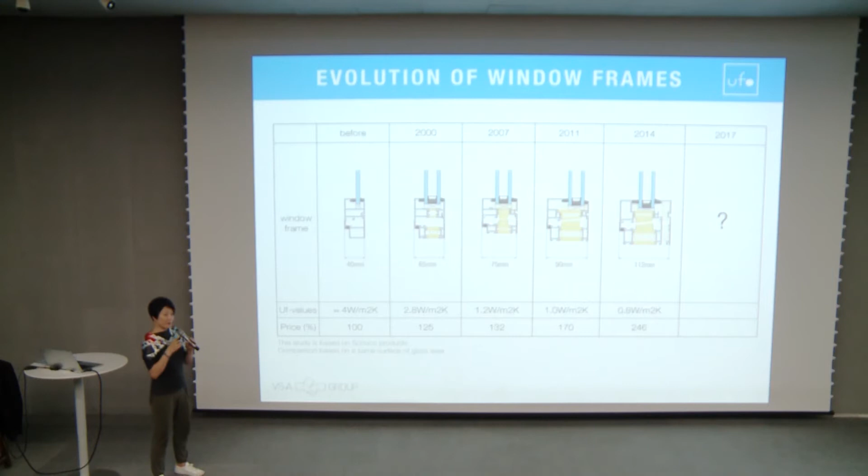So this is also the window frame evolution. It's really focused on thermal performance. So you can make a more performing window. Normally the window becomes thicker and more expensive. So you can really go in that direction, saying more performing, more insulating. But we really try not to go in that direction, but to think a little bit upside down.

It means, why don't we have a frame? Maybe we can just skip the frame, because what we found out is in a window, there's a frame and glass. What is very important and expensive is the frame. So if you can reduce the frame, you can really save a lot of cost.

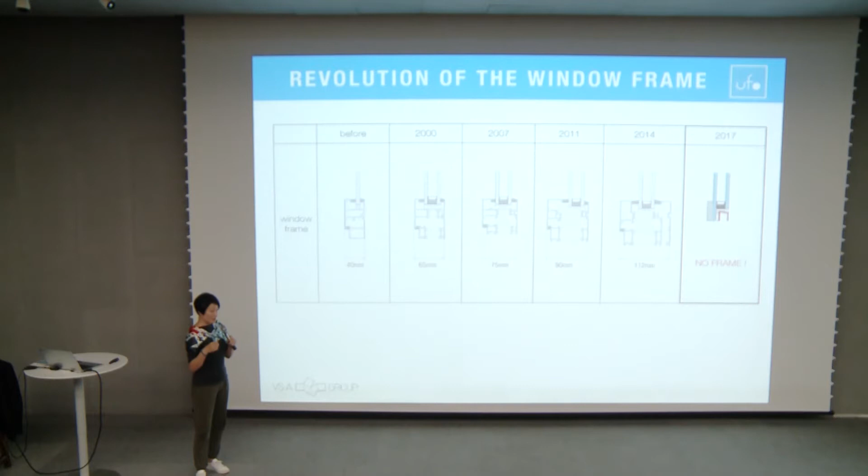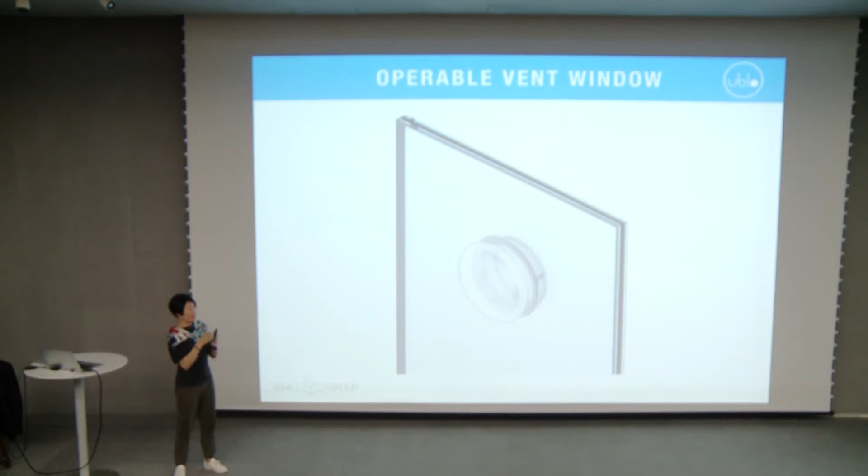So the window that we are developing now is a round window. Actually, it's just a hole. So you make a hole out of the glass, and then like a water bottle, you just open it. That's our ventilation window.

So this is a traditional window. There's a fixed frame, and there's an operable frame, and then you just close and open. But in our window, you just make a hole in the glass, and then, kind of like a lid, you just open and close. So this is the round window that we are making, named UBLO.

By the way, UBLO is a French word, actually with an H and T at the end. It means a round window in French. So we just took this French name for our window.

So our window hole is not that big, but actually for good ventilation, you don't need a really big opening. What is very efficient is if you can create one at the top and one at the bottom, there's a temperature difference. That creates a kind of air pressure difference. So the ventilation can be quite efficient, even with a small hole.

In Korea, maybe in China as well, our air pollution problem is getting really worse. So many people consider installing a very thin anti-dust filter, which is quite expensive. So we thought in our holes, we could also apply an anti-mosquito net, but also, if necessary, those dust filters.

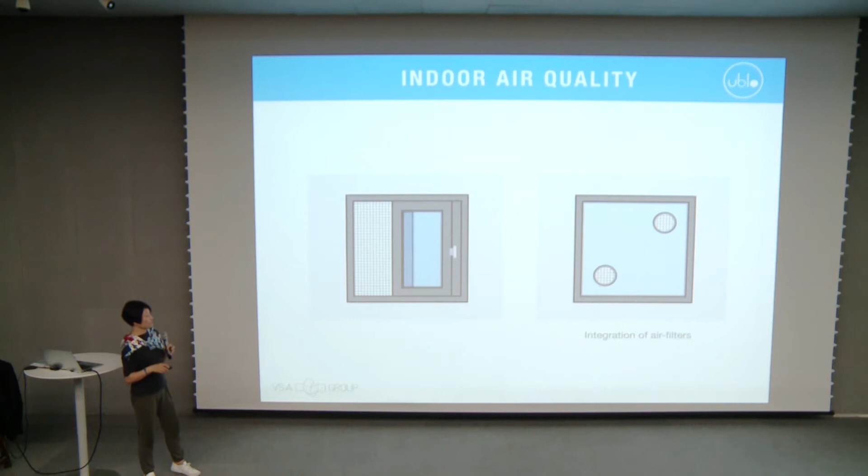Like this. And we didn't make this window very big. Why? Because in high-rise buildings, they have a really huge window, but the opening is like this. You cannot really open it bigger because there's always a risk of falling. So regulations say you can only open about 11 centimeters. So you have a really high, expensive window, but the opening is very small.

So instead, why don't we make the window opening very small? Then even a baby cannot fall through, you cannot really pass through. So we thought this system is very safe.

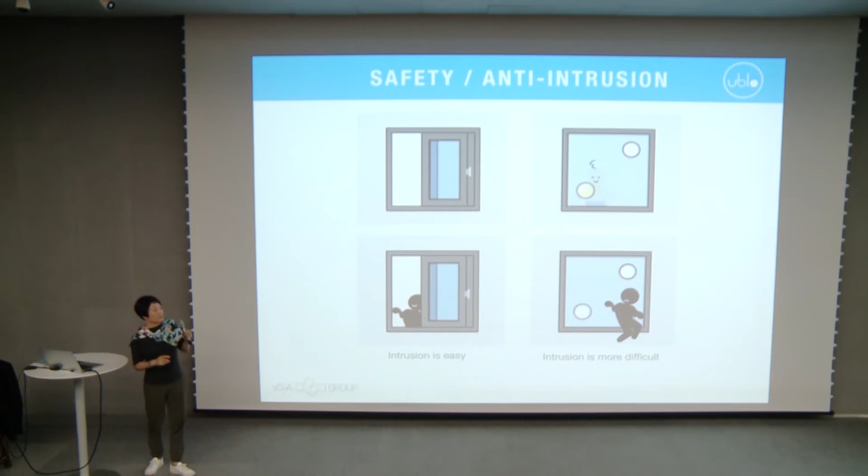What's very important is we made this window 18 centimeters in diameter, which a very regular 3D printer can print. So the beginning idea of this window is that the outer frame is identical, but the interior cover can have different materials or different functions applied.

You can do a plant, or a mirror, or we are also developing an air purifier, so there's a motor system. When the air pollution is really bad, you can apply a cover that acts as an air filter, so outdoor air can come inside clean.

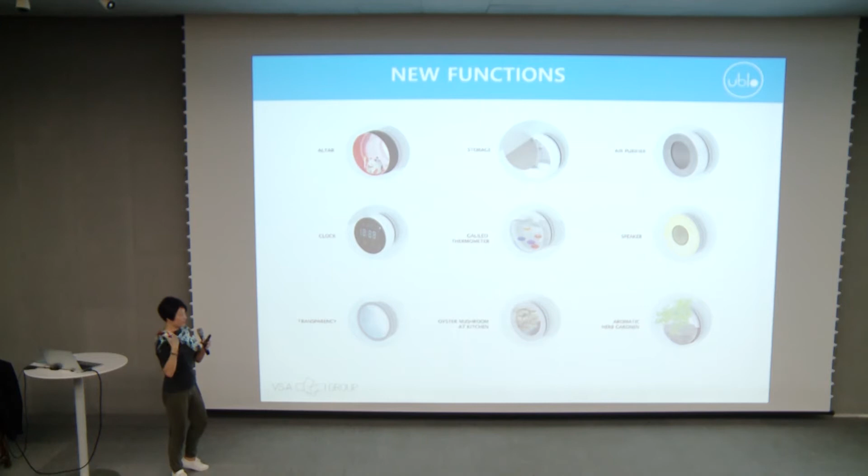So this is some prototypes we are making. This is plant UBLO, and this is a timber cover UBLO. That's explaining how we open the UBLO - you just twist it and then open it.

Robert actually had this idea probably 2 or 3 years ago. He was mentioning this idea, and we thought, oh yeah, it was a good idea, and that was it. I didn't expect we would develop it so far, but then there were some projects, and architects found this idea very interesting, so we continued research and development. Last year we found an investor in Korea, so we set up a company, the UBLO design company, last year.

Another good point of UBLO is maintenance and cleaning. Normally, windows in a curtain wall are very difficult to clean from outside. But since UBLO has a hole, you can use a magnetic cleaning device that passes through the hole to clean it. So we found it's very easy maintenance.

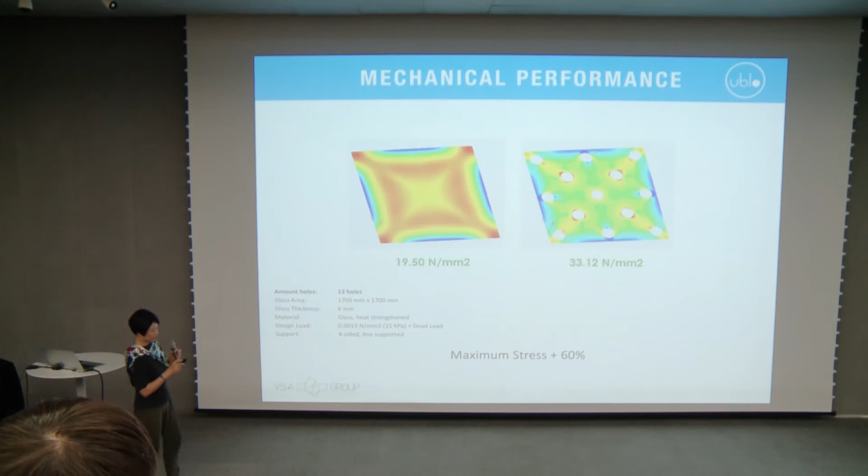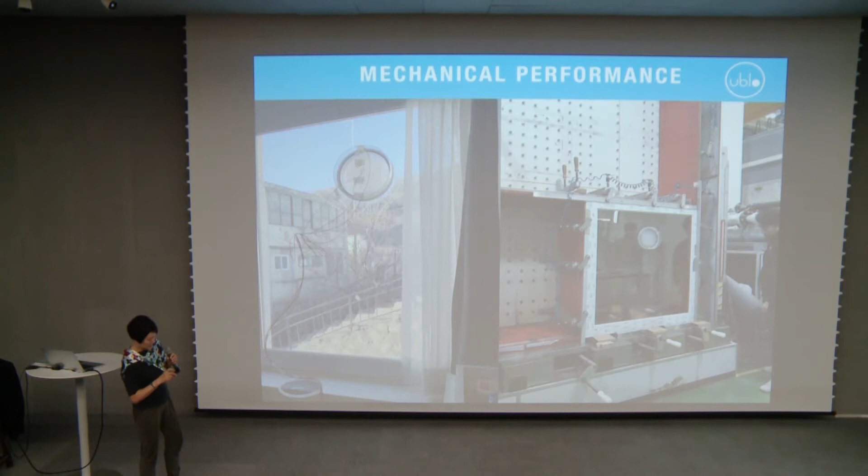What was quite tricky was not the UBLO itself, but how to make those perforated glass panels. If it's a single glass, it might be easy, but normally we use insulating glass, so you need a donut-shaped spacer. That makes this window technology a little more challenging.

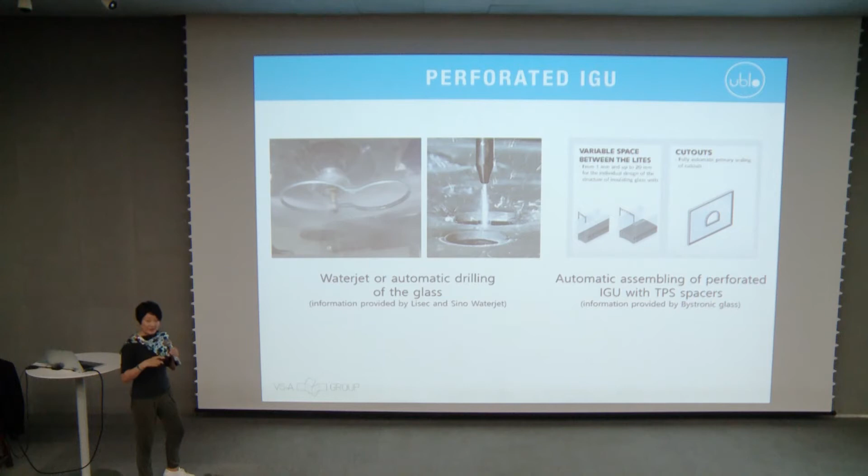So we explored many glass suppliers and spacer suppliers, and we are still finding good solutions. So far, our main glass supplier is AVIC Sanxin, located in Shenzhen, and we are collaborating with them to make those perforated glass panels.

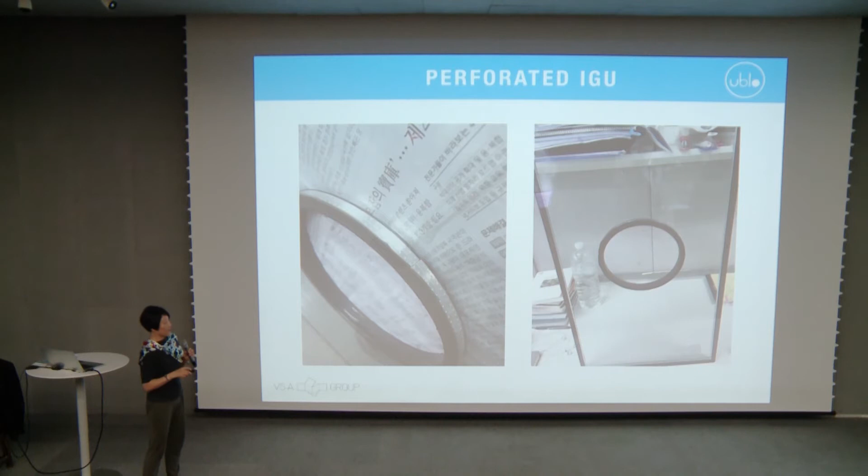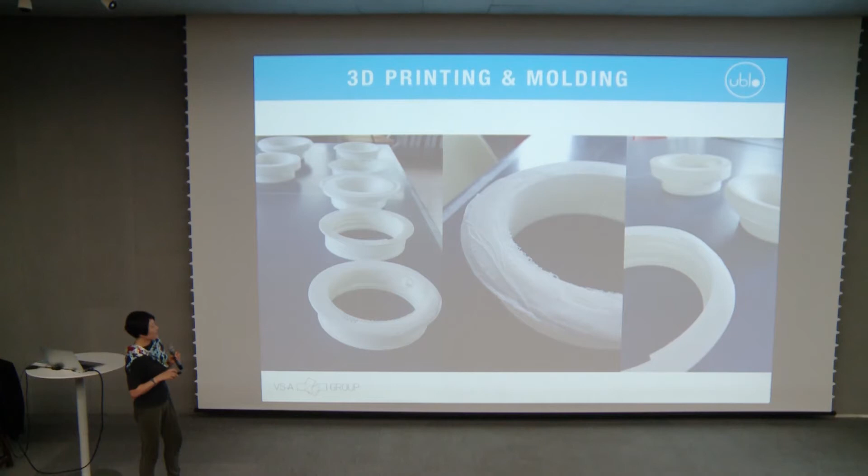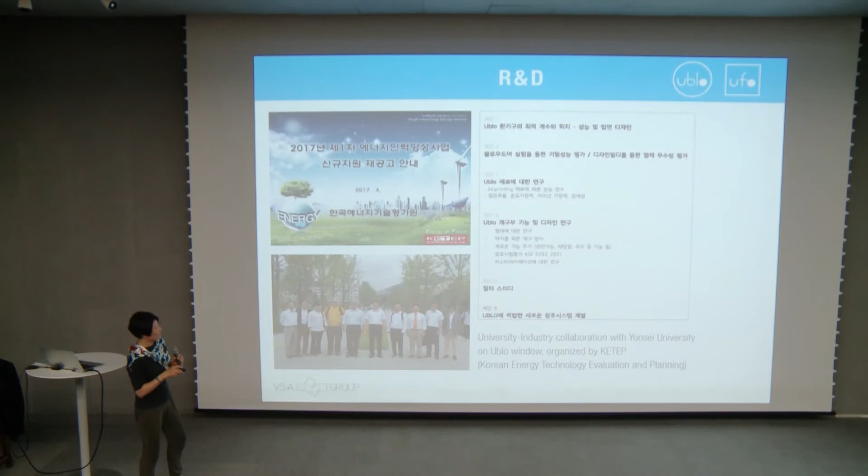We are also continuing to make 3D printed versions - that's the trial and error we go through, making the handle differently or the material differently. That's the team; we are also doing research with Yonsei University in Korea, supported by the Korean Energy Institute.

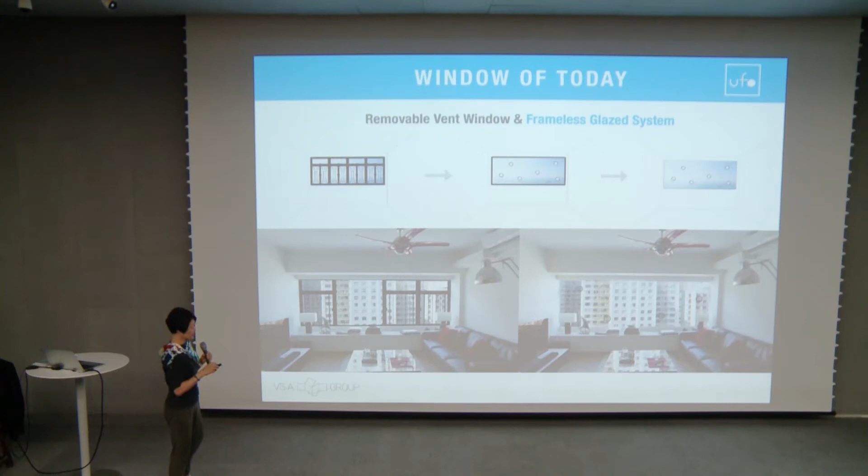That's something we are developing, and this is the first coffee shop UBLO that we sold recently, and that's the prototype we are making right now. So that's it, thank you very much.

Do you have some questions?

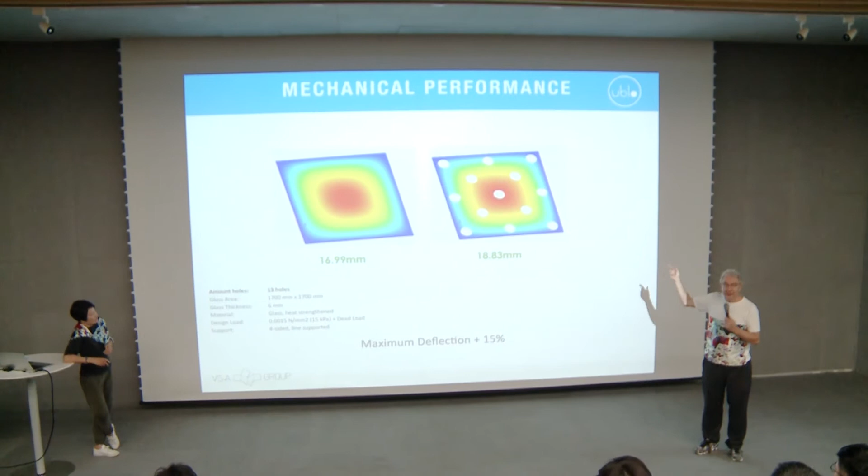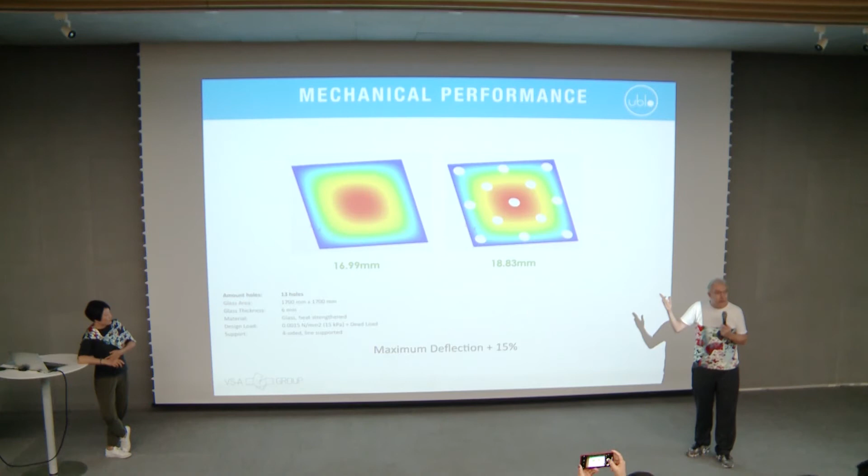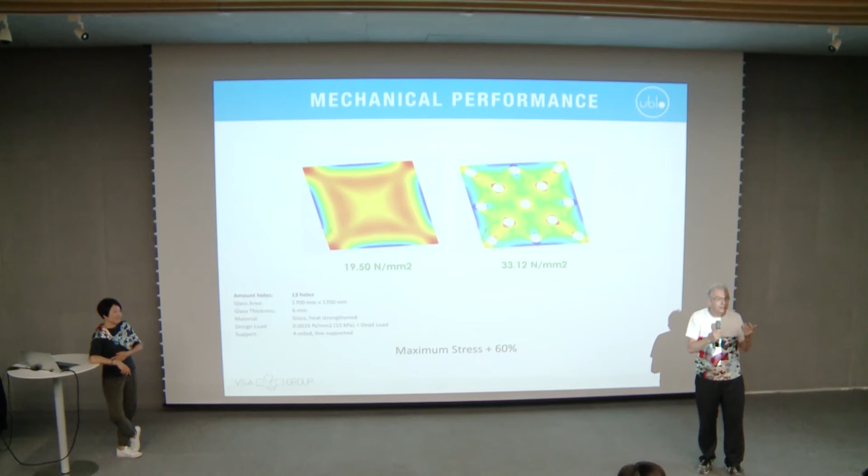In fact, good question, one of the images was showing it. We tried to see what is the impact of, I think, 13 holes on the glass. Okay, normally you should have less, huh? But if you have 13, we see that the stress is increasing, so you must temper the glass, or heat strengthen it, that is the answer. And the deflection is almost not influenced. The round shape - you know, when you have trains, the window in the train or in the boat or airplane always has round corners, because the round corner makes the stress go around the hole. There is no concentration of stress, so the round shape is a very good shape for structure.

I think that's an amazing idea, that's a revolution of window design, and that's a great idea, that's awesome. But the problem is, in places like here, we have a specific requirement for the opening area for all windows, especially for residential projects. My question is, how can you deal with the opening requirement, I mean the area?

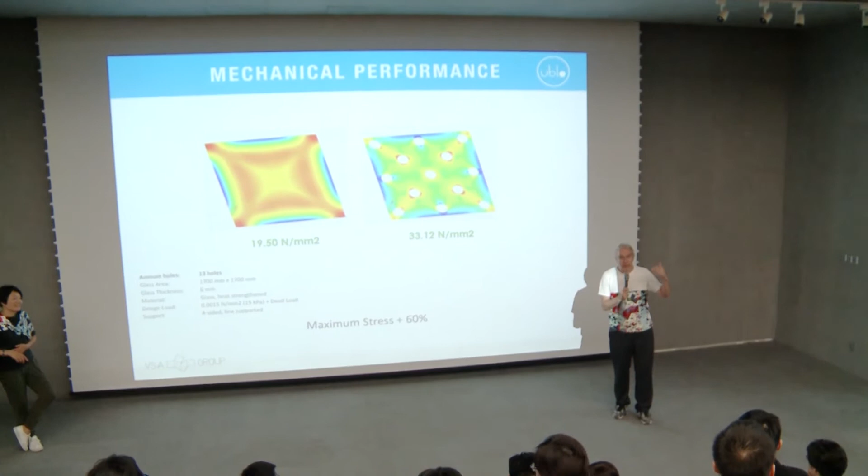Good question. It's a problem of conflict between the requirement of ventilation that people have and the way that requirement is written in the codes. There is a conflict with that, and we approach that problem first by computational calculations, but also by working with the University of Yonsei in Korea to test what is the real ventilation rate that you get with the two UBLOs - is that ventilation enough or not enough? In fact, we are questioning the 10%.

Do you need really 10% window surface to have good natural ventilation, or not? The result we found is that when the UBLOs are positioned with a big vertical difference between two of them, the ventilation is quite amazing. With one window, the center part does nothing, because air wants to go in and air wants to go out there. So a single window is not 100% efficient for ventilation. Our UBLO, when in the lower part, is 100% efficient for air intake, and when in the upper part, is 100% efficient for air outtake. So in terms of renewable fresh air in the room, with tests and computational calculations, we can demonstrate that, case by case, we can achieve the requirements for a healthy life.

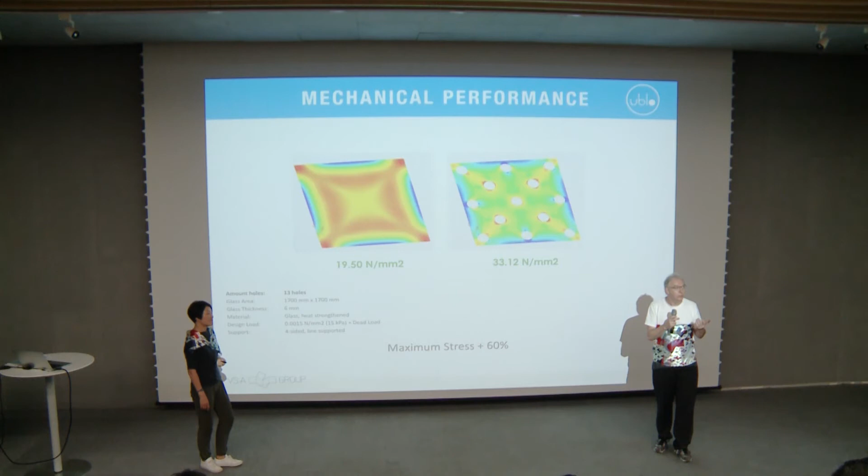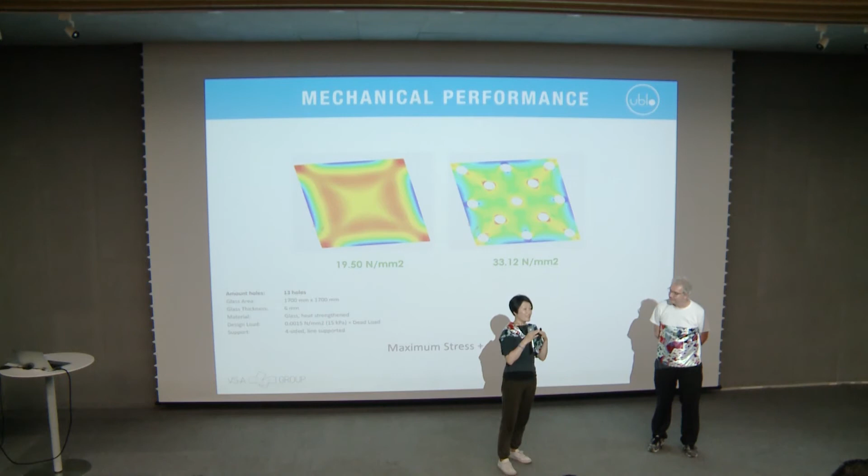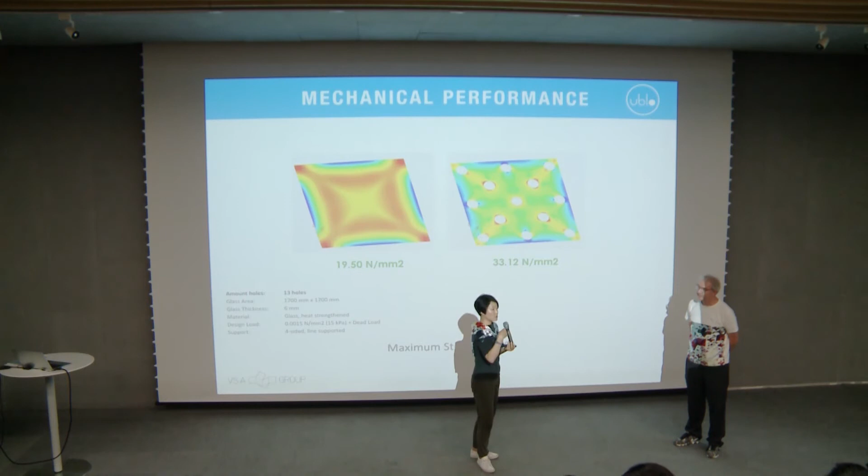Yes, because I know your question. In Korea, we also have a minimum ventilation window surface area requirement, and actually it's quite small, so it cannot be counted as a full surface. But in Korea there's also another regulation about how much quantity of air has to be renewed: in collective housing, 0.5 volume per hour has to be renewed. So we say, okay, our window is small, but in terms of air volume renewed, it's achievable with only two UBLOs. That's kind of how we persuade.

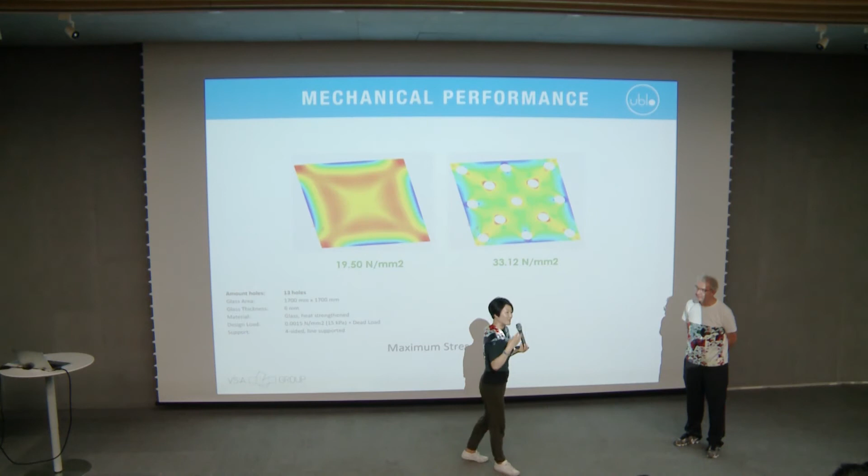Hi, this is Hyun-Soo Yang. I have a simple technical question. Let's say you have the same size window, with 2 holes, top and bottom, versus 4 holes, for instance 2 bottom and 2 top. Based on 100% performance, is there a quite big difference in the result, or is it just similar performance in terms of ventilation?

That's exactly the theme we are testing, collaborating with university students, doing real tests. What we found is it really depends on the opening configuration. The worst case is a horizontal long opening - even with a big surface area, since the temperature is the same across it, ventilation is very poor. What is very efficient is a long vertical opening, because air is cool here and hot there. UBLO was in between. Comparing the same opening size, UBLO was not as efficient as a really big vertical opening, but it was much better than a long horizontal opening or just one window. What's very good about UBLO is you can decide the opening location - we tried opening one on top and one on bottom, like a diagonal arrangement, and compared to a small single window, it's much more efficient. That's the big advantage of this window system.

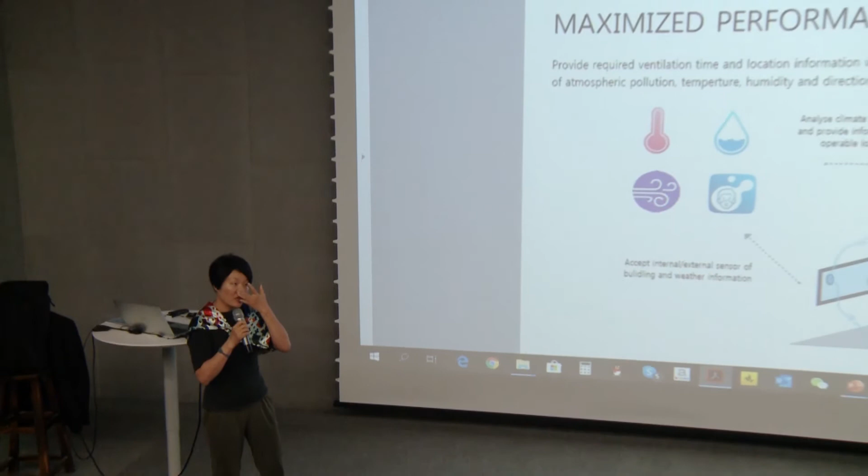So that's the smart UBLO system we are developing as phase number 2 - we have a sensor in the UBLO so we get data from the exterior, air pollution, and also interior air pollution or CO2 level, and temperature and humidity outside and inside. Then we determine which UBLO has to be open when - maybe in a lower part for air intake or exhaust. As we mentioned, we're also developing motorized air filter purifier UBLOs, so we'll know better which UBLO should work for air intake or air exhaust. That's the issue we're developing right now, which we can probably present in about 2 years.